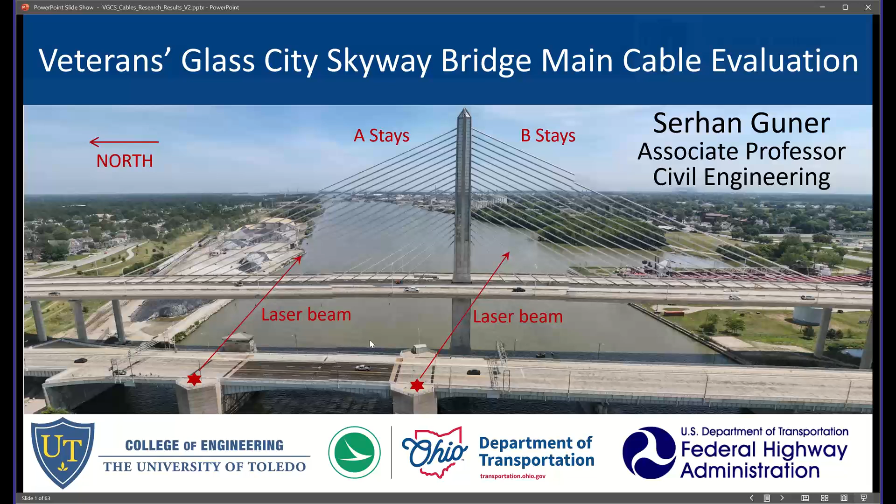Today, very nice, beautiful weather in Toledo, and this photo also shows that condition. We are talking about a signature bridge located in Toledo crossing the Maumee River.

I would like to start with my acknowledgements. I would like to acknowledge ODOT Technical Advisory Board: David Geckel, Jared Bax, ODOT Program Administrators Jill Martindale, Jennifer... sorry, all right, I think something happened. All right, Jennifer Springs, University of Toledo faculty, Dr. Douglas Nims, Daniel Georgiev, and my fellow graduate research assistants, Suraj Dungal. Special thanks, we did a lot of site work, you are going to see his photos soon - Yugesh Maharjan, as well as Sandeep Bajagain. So they all contributed tremendously to the success of this project.

So the focus is stay cables. They are the most vulnerable component of the cable-stayed bridge. The main concern is corrosion of the steel strands, plus there could be other deterioration conditions, which could be section loss, pitting, breakage, nicking, compromised grout or grease, voids, water infiltration. So this is a proactive project.

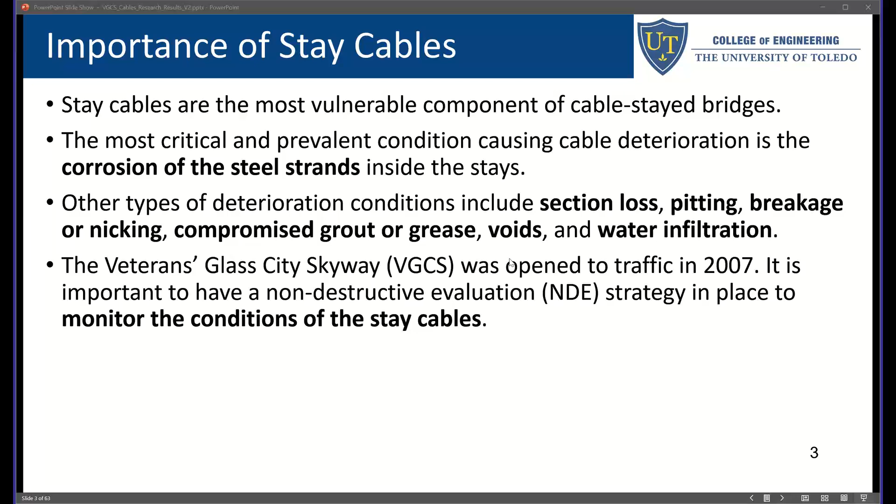The bridge opened to traffic in 2007. It has been quite a number of years since construction, so ODOT wants to have a proactive, non-destructive evaluation strategy in place to monitor the conditions of the stay cables. Are there any corrosion, any deterioration? Is it started, or when is it going to start in the future? So this is looking into that condition.

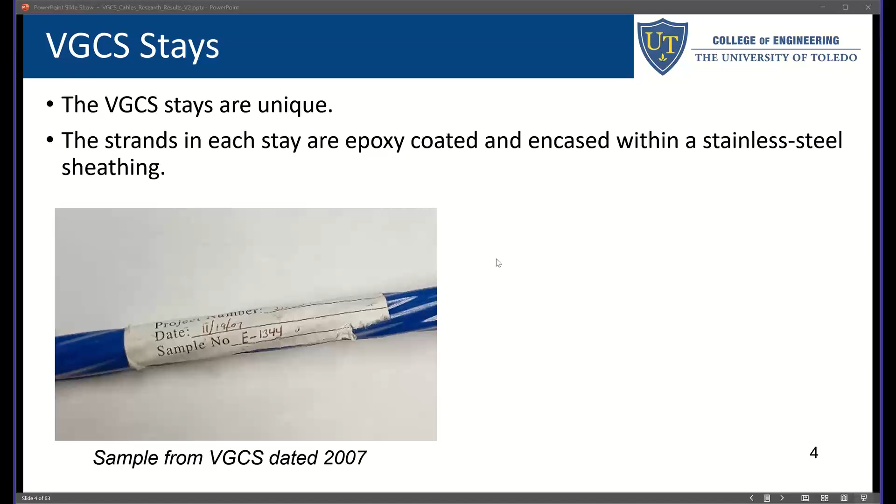What makes the project unique and interesting to us as researchers is the strands, because this bridge is unique. Strands are epoxy coated - these are the actual photos from samples received from the bridge. But what makes it unique is that there is no grout. These are non-compacted, so each strand continues all the way to the top of the pylon.

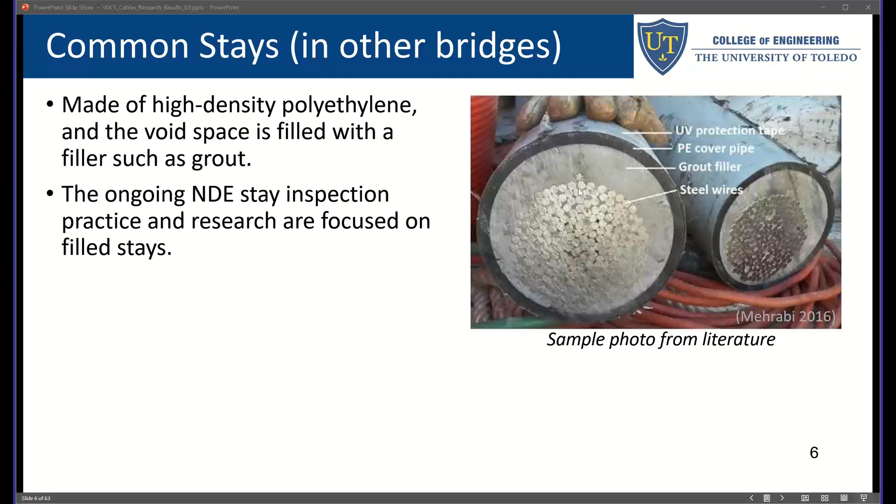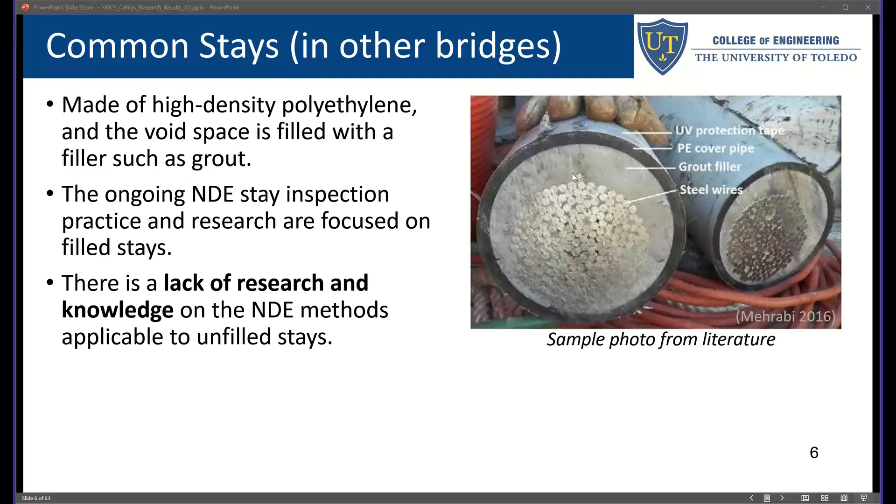Strands are compacted - this is a traditional condition. These are compacted, you can see all the strands together with the grout filler. So this is the case where we have lots of NDE in place. But because of our unique non-compacted situation, which is, by the way, in many cases a good approach for corrosion deterioration - and we can talk about it later on - non-destructive evaluation methods are really lacking because we don't have this very common setup. So the objective is to determine an NDE method for monitoring, but we would like to use existing technologies.

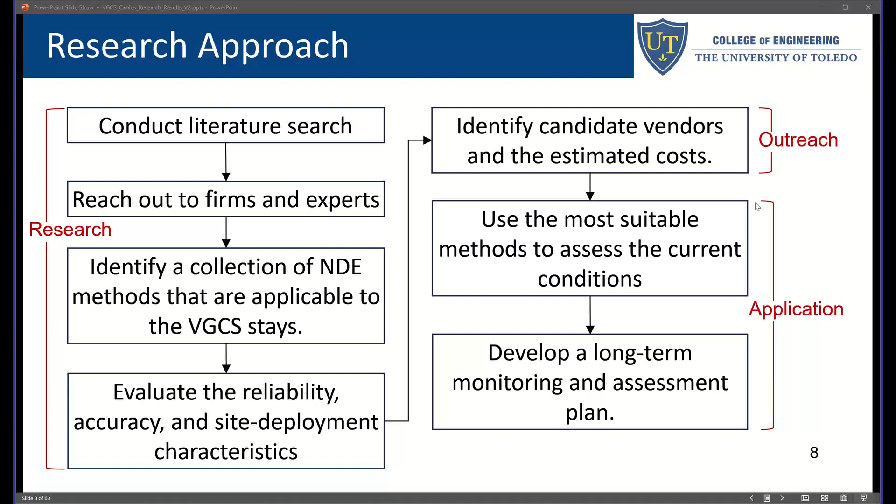This is not about developing a new technology which would take 5, 10, even 20 years. So it's about existing technologies as well as a long-term monitoring and assessment plan. You can see the research stages - this is the research phase, which we love doing. Outreach is all about seeing what's available, talking with vendors, costing, timeline, do they have it available? Sometimes the instruments come from Europe. Finally, application - whatever we selected, we get to use it and show that it works or it doesn't work. So that's what we did.

It is a big bridge, right? So you need to categorize it based on priorities. We have two important zones: the first one is the anchorage zone, the second one is the free lengths of the strands, which I'm going to show you in a photo. The anchorage zone is the most critical location because, as you know, you have a mass of steel coated with epoxy. Typically, if you have corrosion, it would start from the ends, which represents the anchorage zones.

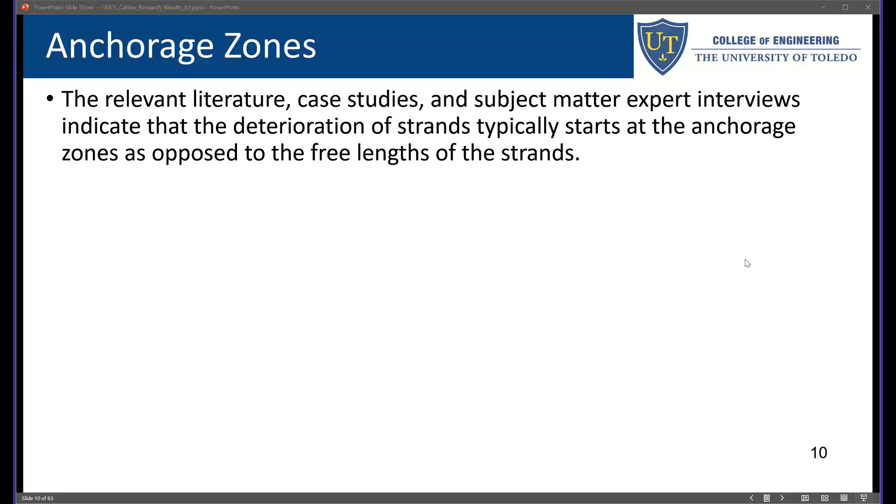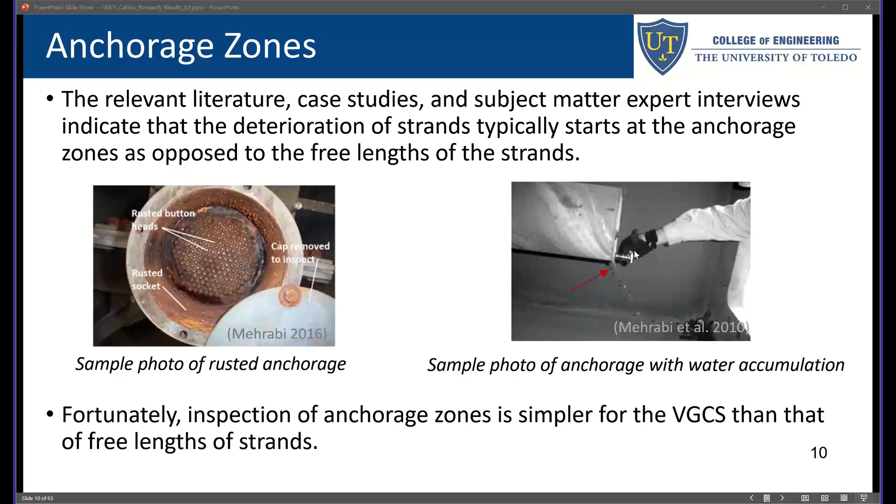Fortunately, inspection of anchorage zones is simpler than free lengths of the stays. How can you inspect? You can do hands-on inspection, which is really not non-destructive. I mean, you're opening things up, if you have that capability.

You can do visual inspection using a borescope or other methods. You can do dissection of sheathing for visual inspection of fillers and strands, which is again not non-destructive. You can also do material sampling and testing for anchorage zones.

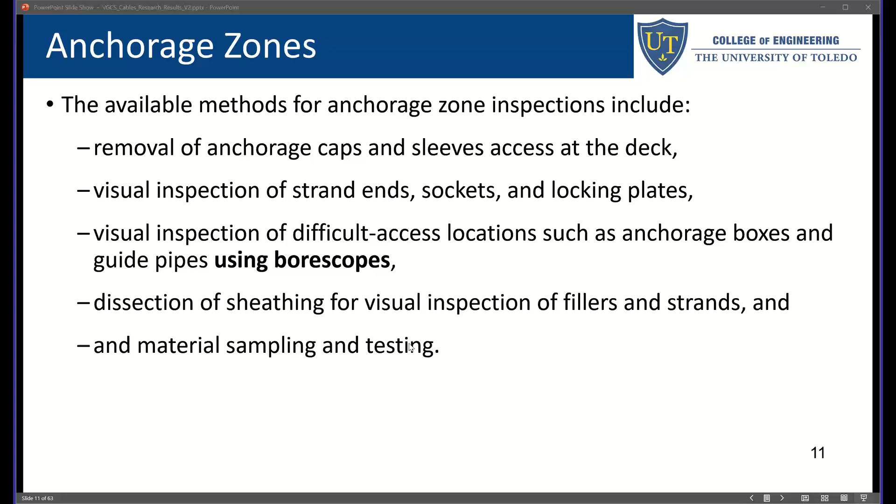The second priority to us is the free lengths of the strands. So once we see what's going on at the anchorage zone, there needs to be a method to look at what is inside, what's in the free lengths.

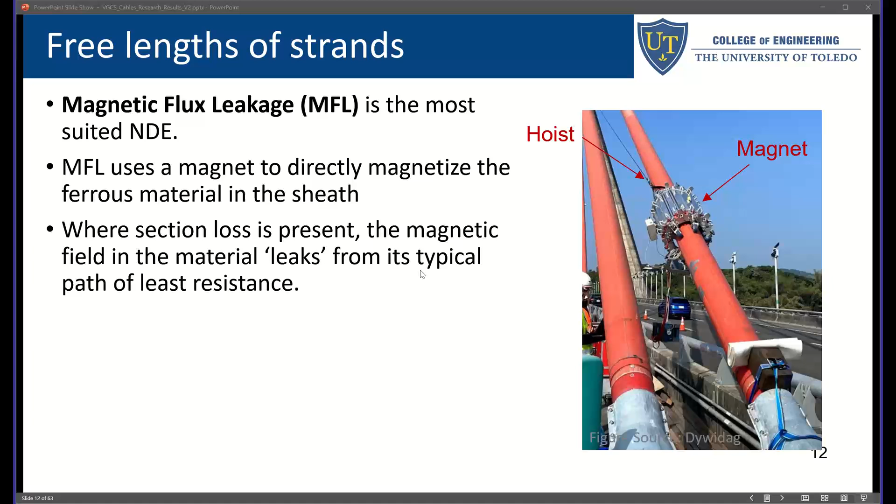One applicable method is magnetic flux leakage, which uses a magnet. There's a hoist, you pull it up, it magnetizes, and you can measure the leak from the path of least resistance, and detect corrosion. But this method is not for detecting superficial surface corrosion, so you won't be able to determine the point surface corrosion starts. There should be notable corrosion already taken place.

5 to 10%, I would call it closer to 10%. So 10% of the strand needs to be gone by corrosion, right? Or 5% in the best case scenario.

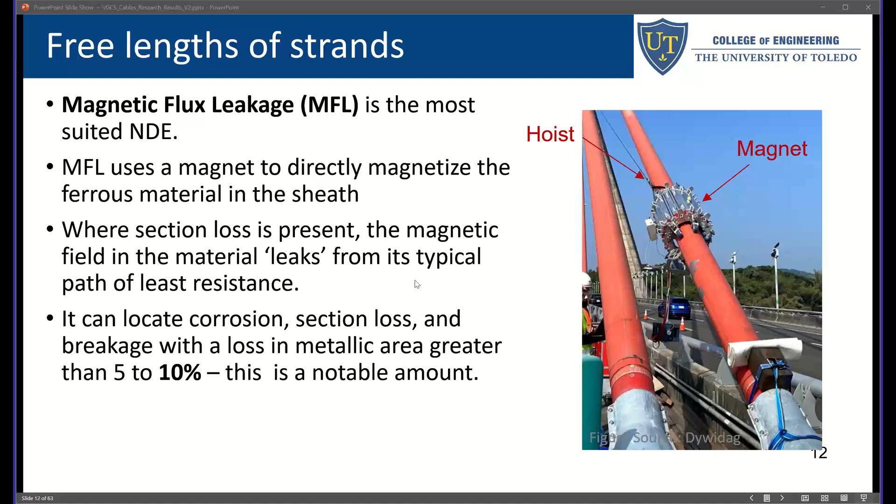The other method is the global health assessment. This is not just looking at the stays, but the holistic cable stayed bridge. You can use vibrational methods to estimate stay forces and compare them with healthy conditions.

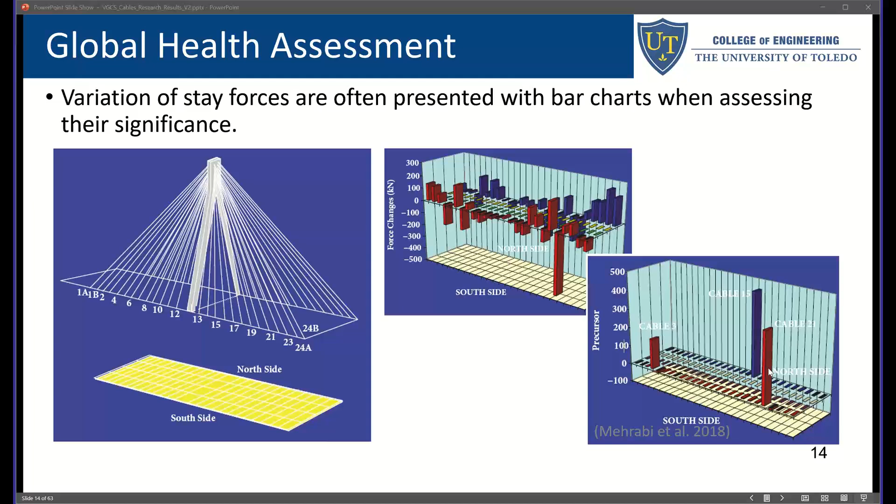This is just a sample from literature. You can determine the forces and compare them with healthy conditions, and look at the changes. For example, in this example, there are 3 cables with some notable changes, so that indicates something is wrong. It doesn't indicate there is corrosion, but it indicates something is wrong that should trigger a more comprehensive evaluation.

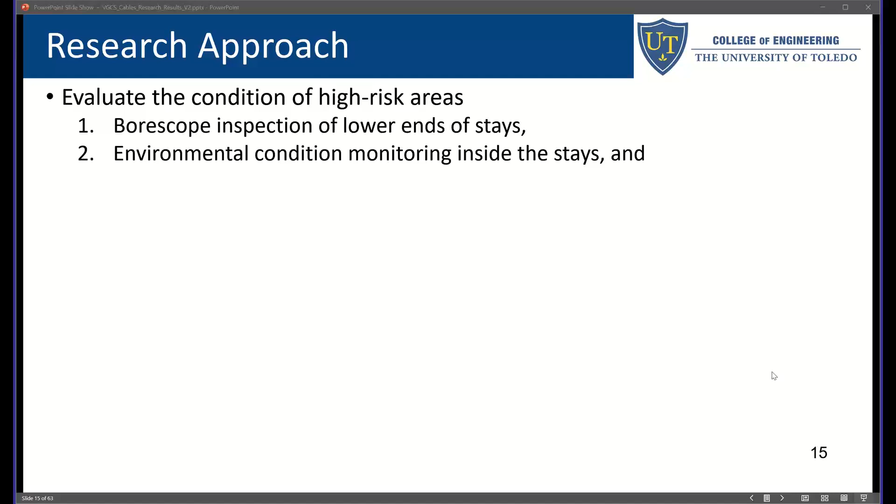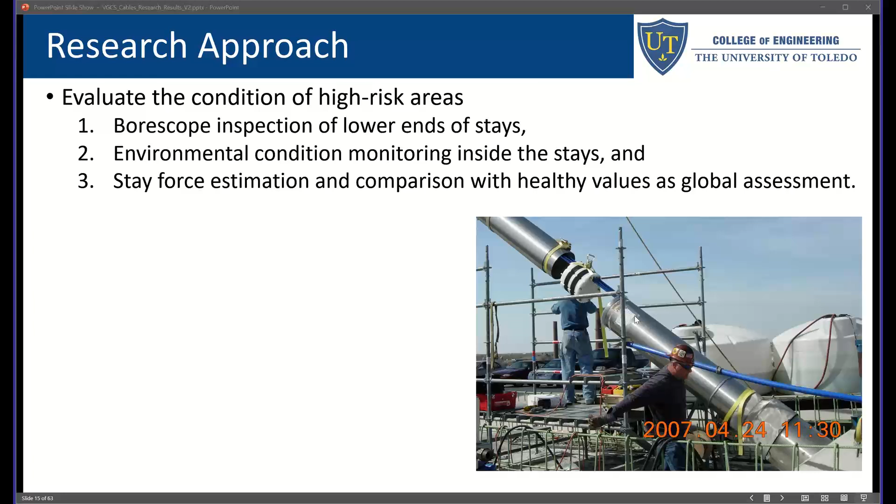Our research approach was to focus on high-risk areas, which is the anchorage zone: borescope inspection, completely non-destructive, we didn't open anything; environmental condition monitoring inside the stays, again non-destructive, non-invasive; and the third one is stay force estimation, the global health assessment—what are the forces inside stays, compared with the original healthy conditions. So these are the 3 things I'm going to be presenting.

If we detect any corrosion or any indication of deterioration, then the most difficult, more expensive approach, magnetic flux leakage, might be an option, in which, as I showed you in the photo, you slide a magnet, hoist it, and detect any significant corrosion, 5 to 10%.

So right now I'm talking about visual inspection, and then I will move on to environmental condition monitoring, and finally vibrational testing. So you're going to see what stage I'm at in this presentation.

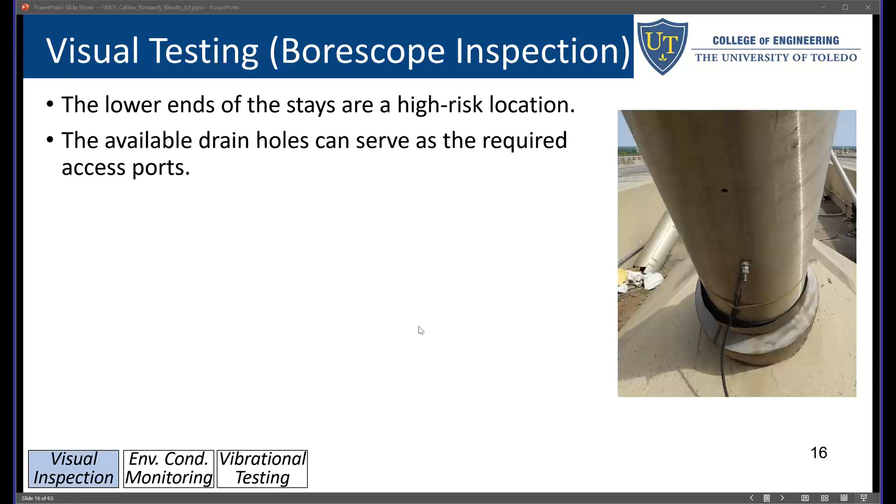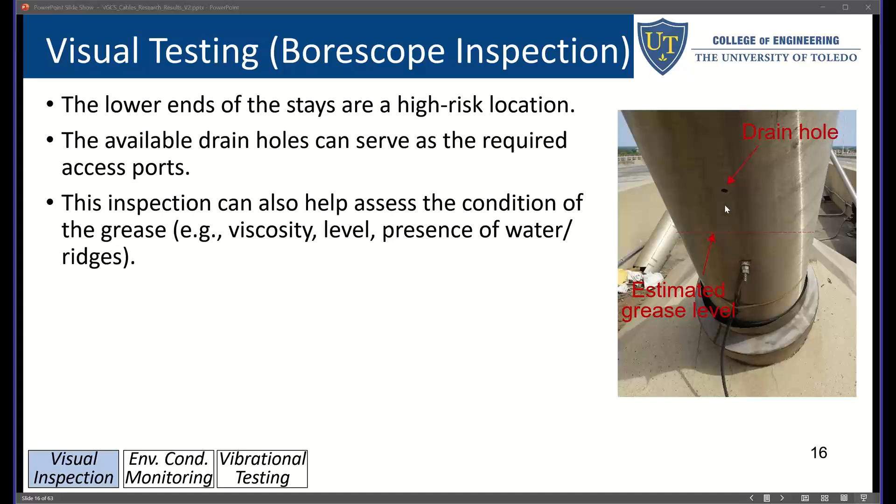We were lucky because there were existing drain holes, and we looked into options for how we could go in and do a visual inspection. Because if there's any water going into the system, this is a perfect location. There is grease—are there any water accumulation on top of the grease? How do those strands look like? Do you see water running down, or do you see them dusty? These are the things that we wanted to see.

You have a joystick, and you can adjust the angle, or the viewing location of the probe. We also used some aluminum wire because these cables are quite flexible, and we want to go upwards as well, so you need something rigid. You can see how we are doing it.

Down is a dangerous location—there is grease, you don't want to put that probe into the grease, so you have to be careful. But up, it's free, you can go as much as the length permits, and we use the entire length to go and see what's inside.

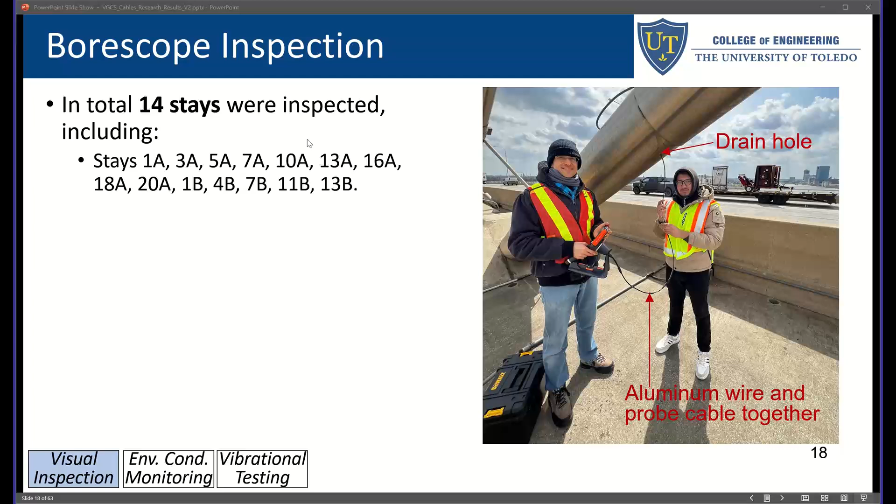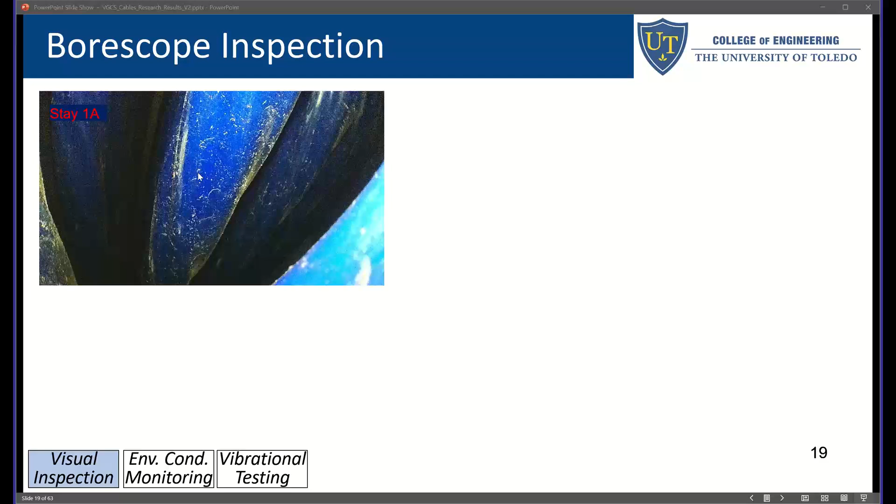14 stays were inspected, so it's a good sampling. 250 plus photos were taken. You can see the photos. Stay 1A, this is the north side of the pylon, the first stay. You can see how this is up, this is down. You can see the grease.

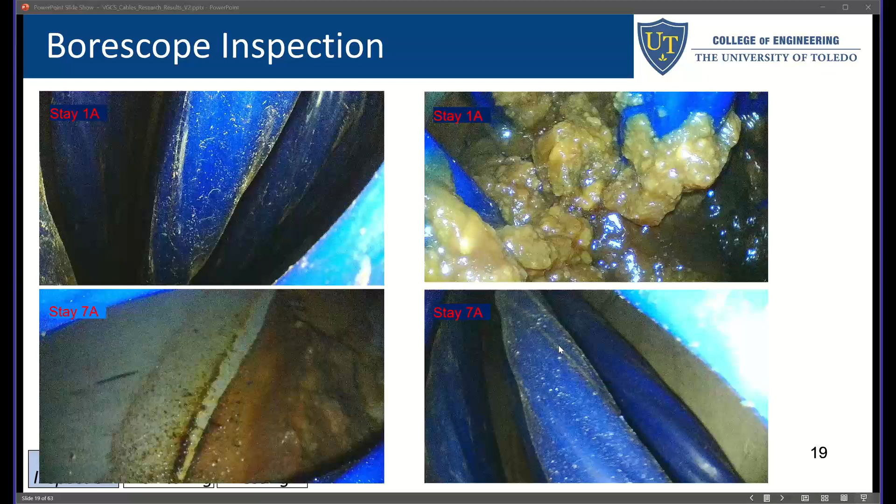You can see the side view. Grease subsided a little bit, but no water. We don't see any water. You can see this is another one looking up. Stay 7A, 10A, so pretty much the same.

Looks very nice, looks like brand new. Dust is a good indication. We like to see dust everywhere. It indicates that there wasn't any water running down. So pretty good condition. We didn't see any epoxy coating damage or chipping or any indication of corrosion by any means. Dusty, which is a good condition.

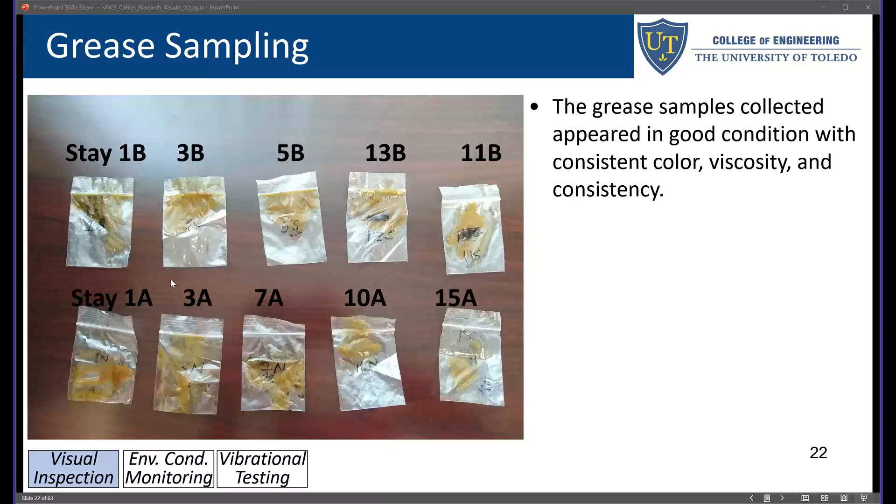We also collected some grease samples, because the question is, how is the grease doing? Is it keeping the viscosity, consistency, what's the color, etc. So we inspected these samples, and they appeared to be in good condition. We didn't notice any stiffness or any unusual visual changes in these samples.

So I'm done with the visual inspection. The second question we asked - yes, okay, good, we don't have any water, we don't seem to have any corrosion, but how is the inside doing compared to outside? Meaning, is it a really humid condition? Is it suitable for corrosion?

Because again, we are looking at the anchorage zone, but we didn't look at what's going on at some other locations. So we want to understand, is it more humid? Is the condition suitable for corrosion? Because you need moisture and oxygen. So if you have humidity, there's oxygen for sure, so you might have some corrosion.

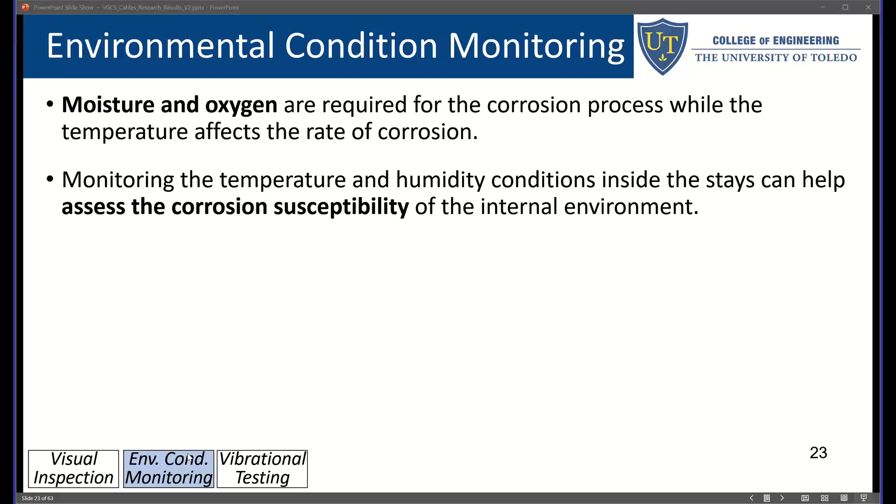So that's the objective. So again, we looked at what's available, and again we want to use the drain holes. Those holes really came very handy in this study.

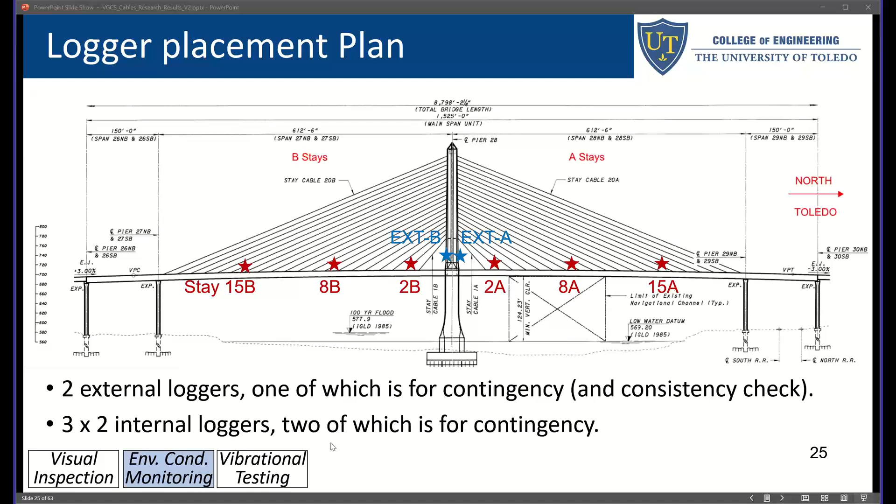We only need one, but we use two because something might happen, it's a site condition, open, lots of snow. So we used two external, as well as six internal, going into the inside of the stays. More than what we needed, because we expected failures. It's a harsh condition - yes, the loggers based on manufacturer are rated, but we'll see. We got some failures, so we really oversized, we used more than what we need in terms of sensors.

So you can see how they look. This is the internal one with the probe. You can see the ruler, it's about 4 inches length. There is an attachment point - you can attach anything, but we attached aluminum wire to make it stiff, because you don't want this to bend and go into the grease.

Humidity sensors, there should be no saturation. Humidity sensor, if you have rain, it is dead, you lost it. So the humidity sensor should always look up. If there's any water running down, it should go down, it shouldn't go up to the sensor. So that's an important consideration.

We also use this automotive wire loom tubing because of the vibration. The drain hole has sharp corners - of course, any hole will have some corners and it might cut the cable. So you want to really put it in, and we saw that it even cut this one. We didn't have any failures, but at some locations we saw it started to eat this tubing.

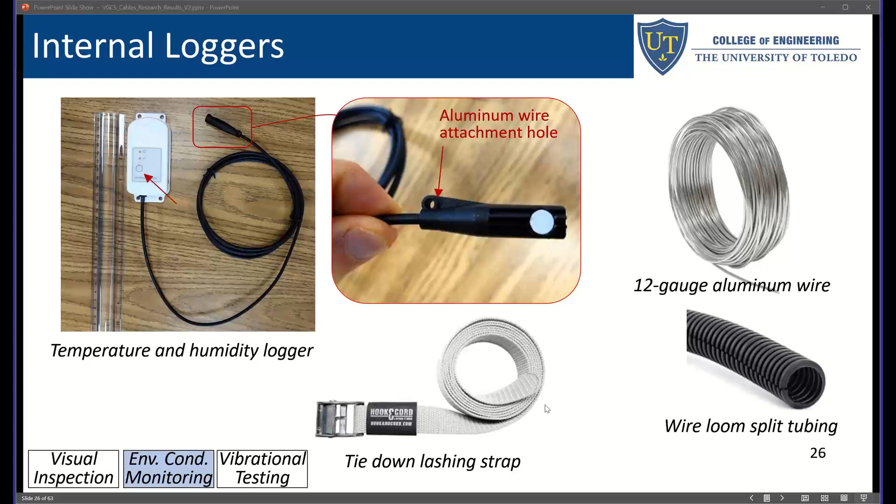So it's definitely recommended. This is the strap that we used for attachment. You can see how we are doing it. This is the bundle - probe, cable, aluminum wire, tubing together, stitched with electrical tape.

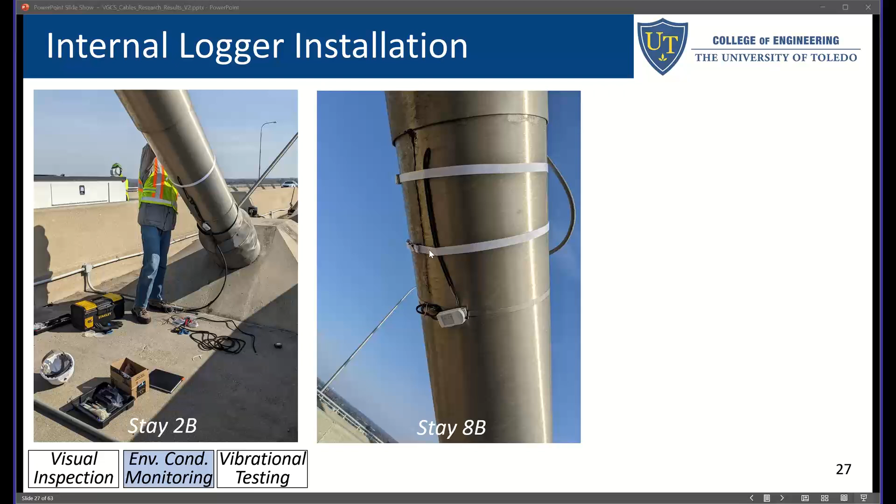So the hole should be suitable. We measured everything. You can see this is how we attached the logger, a lot of zip ties. These are different stays, and as you can see, the cable goes down and the probe should go up. If it goes down, any water here would run down, which is something we don't want in this study.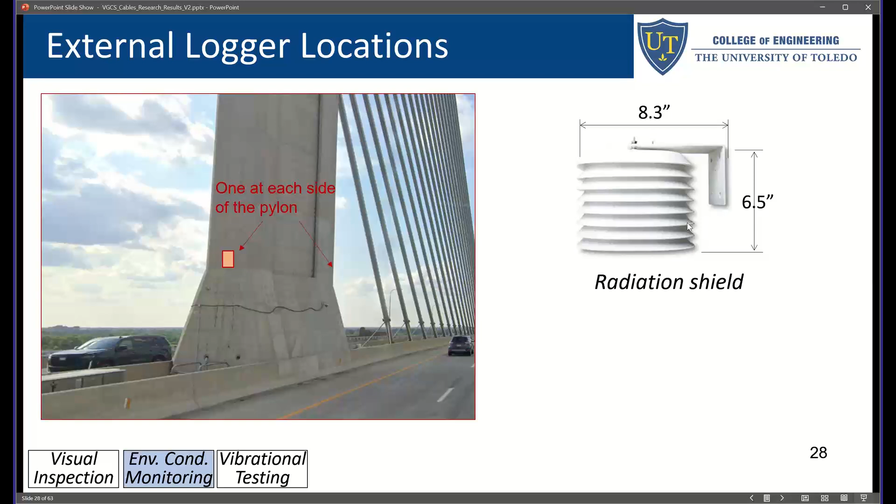And 2 external, one to the north side of the pylon, the other on the south side. You want to put it in a radiation shield because you don't want direct sun exposure. And we check the consistency, I'm going to show you in a minute. Both measured exactly the same temperature, exactly the same humidity.

This is the installed version, installed logger, which is very small. You cannot see it clearly, but if you are driving by, you can see these definitely.

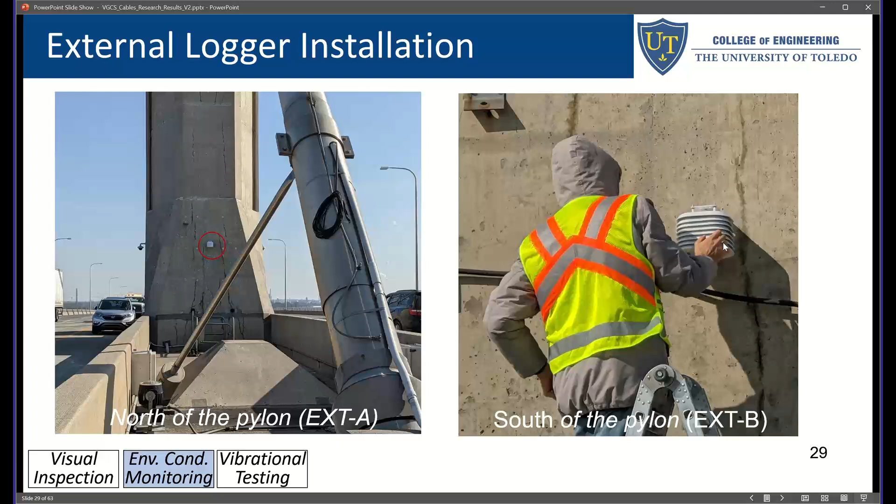So two issues. The first one is battery life. We had to replace batteries. Battery replacement is not something very user-friendly. You need to open up the device. There is a dehumidifier bag in it. You have to replace it, replace the battery, put it back. So it's something that we had to do.

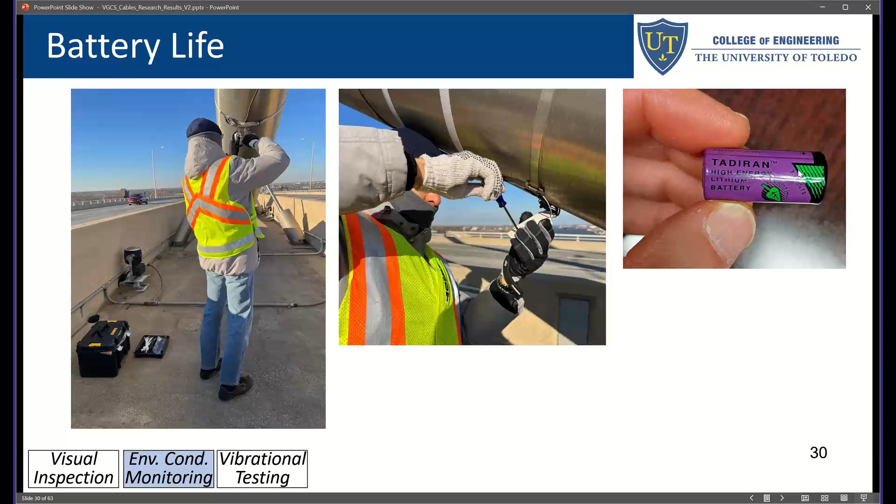This is the battery that's used. Based on the manufacturer's data, the battery life is 5 years. This is what we did: power saving mode enabled, we use a logging interval of 30 minutes. So even with a 1 minute interval, it should last 5 years, but in our study, it lasted 9 months. That's why I told you the manufacturer's data may not be representative.

Some of you might think, oh, maybe the loggers sat on the shelf for long. We checked the battery manufacturing date, it's written on the batteries, and it was 24 months old. So even if you count all the days the logger were sitting on the shelf doing nothing, not recording anything, 24 months is still not 5 years.

The second issue is the logging interval. We don't need very frequent measurements. 30 minutes is more than enough for our purpose because things do not change. This is not an instantaneous change we are looking for, it's long-term monitoring. So this is the configuration we set it up. If you set it to 30 minutes, there's a memory inside the device, and it would let you record for 1.8 years, which is what you want.

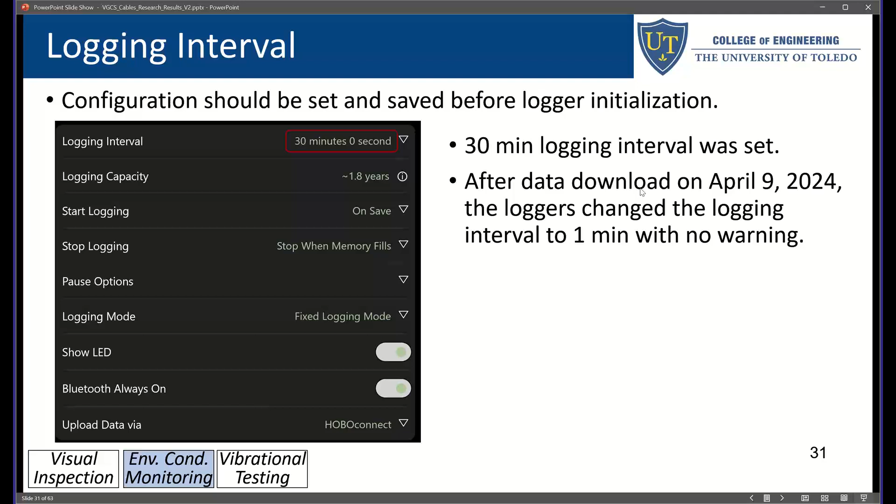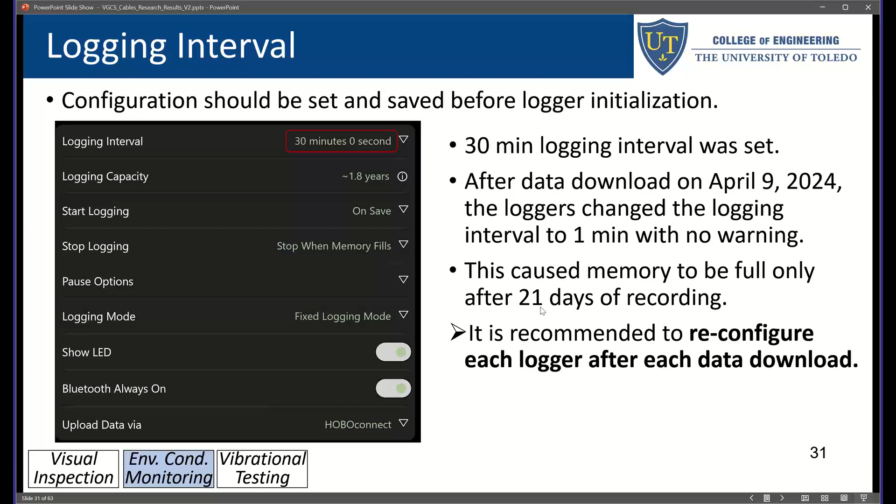But something happened during the April 9th data download. It switched back to the default 1 minute, which we didn't realize. So what happens if that happens? Your memory would be full in 21 days. This is something we experienced. So the recommendation is that whenever you download, you have to check your logging interval all the time. You don't want it to go to 1 minute and then stop recording data. So we lost some data because we were expecting 1.8 years, but got 21 days. We lost a couple of months of data.

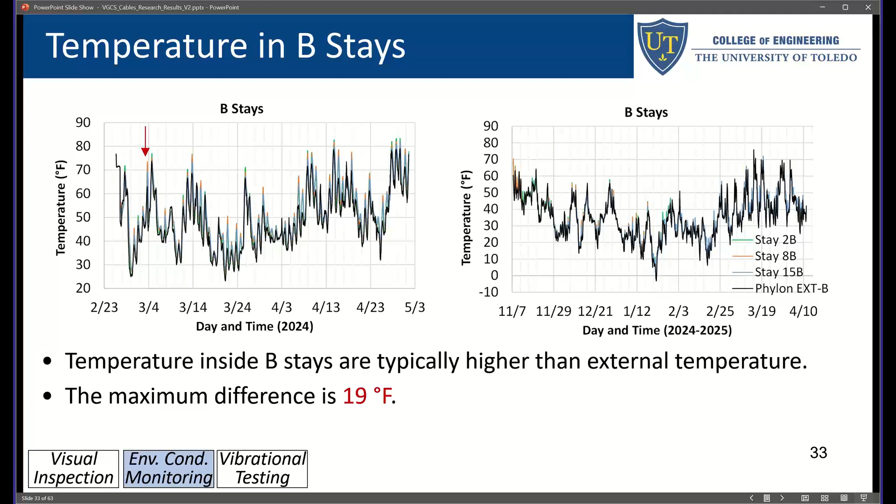If you look at B, very similar, it's 19 degrees higher. This is happening around March, so temperature is higher as expected.

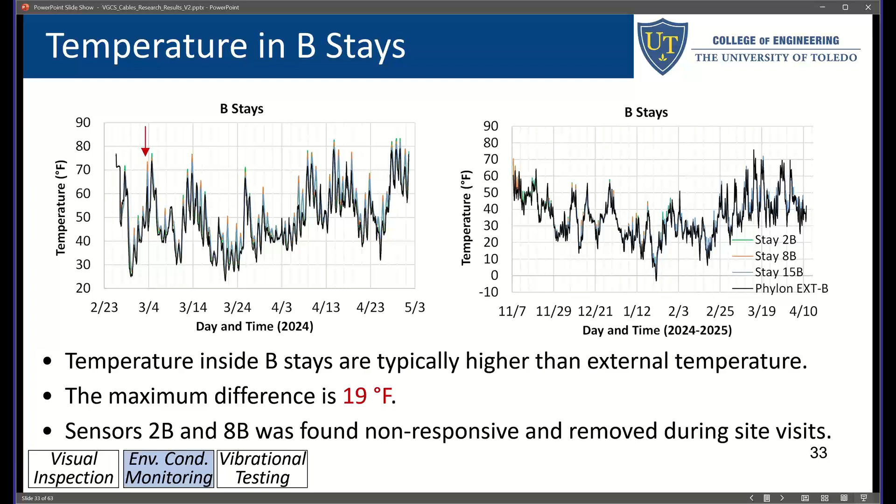We had some sensor failures. We were expecting that to be... 2B and 8B was found non-responsive during one of the site visits, so we took it out, but we already had more than enough sensors, so we ended up with 2 external and 4 internal versus 6 internal.

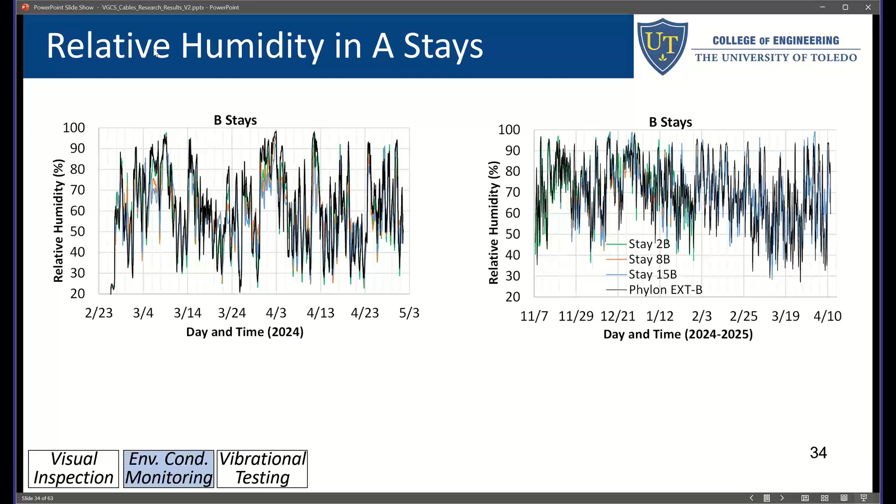What we should be using is a measure called dew point, which is a combination of temperature and humidity, so it takes account of both. If you look at humidity, 50% humidity, 50% humidity, 50% humidity, right, but there is much more moisture or water in this case. So relative humidity is saying 50% of the cup is full, but the cup size is dependent on the temperature. As temperature gets higher, air can hold more moisture, so the cup size gets increased. If you look at dew point, which is the absolute measure, that's what should be looked at. Dew point 37 degrees indicates much less moisture than 74. So that's really what should be used.

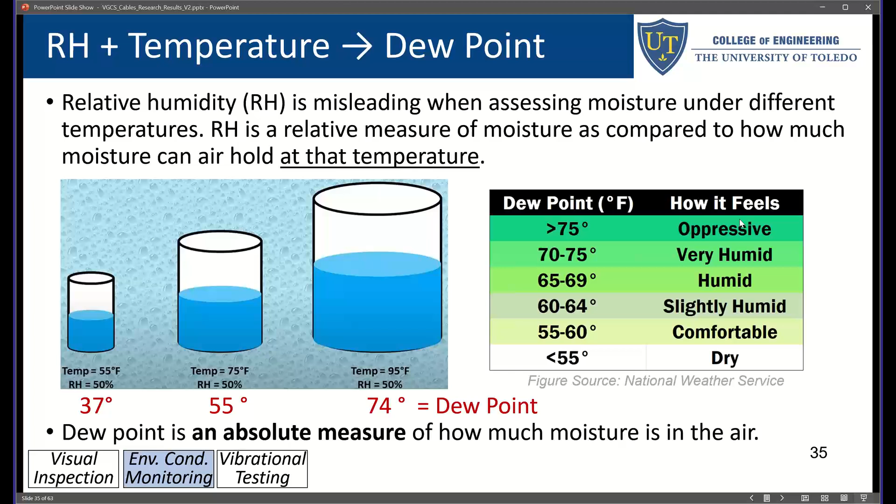Maybe you are using it already when you are checking temperatures during summertime. This is for humans, but still it's a good indication. So if you're checking dew point, if it is 55 to 60 degrees, you would feel it comfortable. But if it gets higher, so 74 is really oppressive. You are going to feel that it's really dense. The air is filled with humidity, right?

So if you look at dew point data, of course we have larger dew points. As you can see, the black one is external, the color ones are internal sensors, and you can see substantial increases inside in terms of dew point, or in terms of humidity. But the good news is that they are typically at the lower points. We don't have a peak point and then going up, with a few exceptions, maybe one exception, which is a minor 5-degree exceedance, which is acceptable.

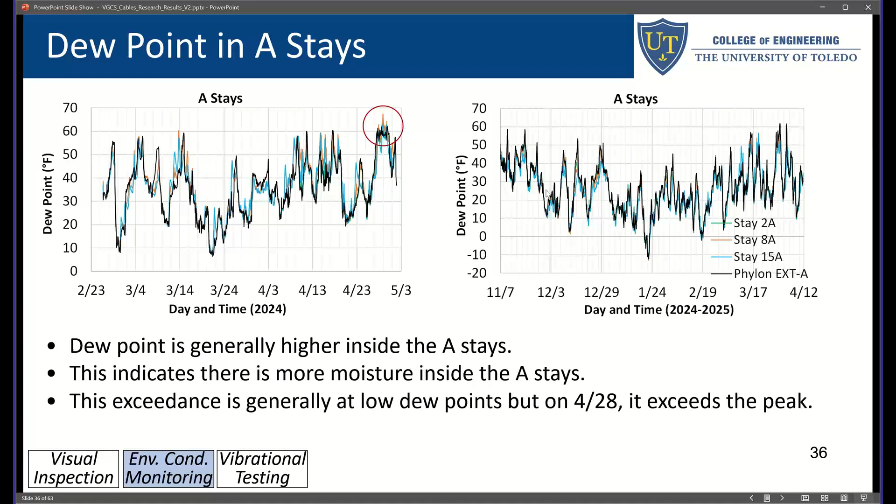So again, we are not looking at a couple of degree difference. Of course it's going to be different. Inside is going to be, it's an enclosed area. It's expected to have more moisture in it, but we are looking at a trend that inside is consistently humid. There's like a very substantial difference, you know, if you look at the data, we don't see that. It's very, very similar, in many cases lower. There are some exceedance, but it's not exceeding at the peak points, with one exception. So we didn't have any concern for excessive humidity.

This is sensor consistency. How are we measuring? Do we have some reliable sensors? Yes, we do. These are the two external sensors. They are measuring the same thing, external temperature, and you can see, hard to distinguish, they are on top of each other, so it is pretty reliable.

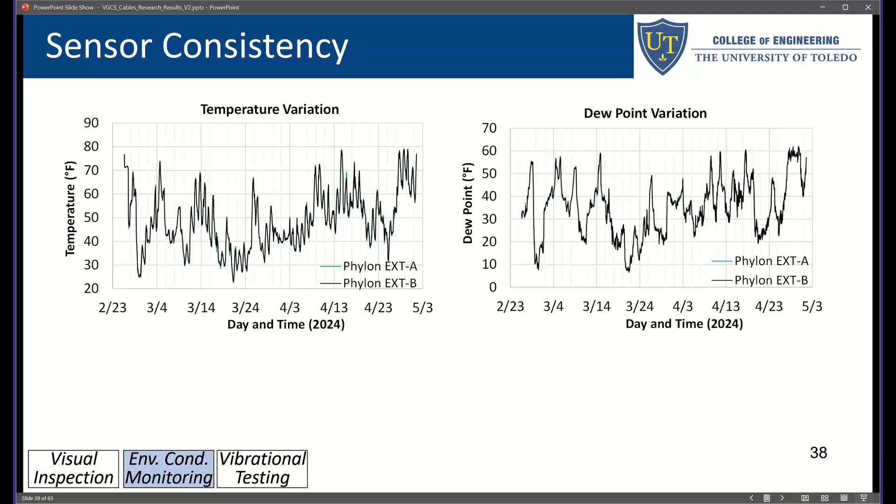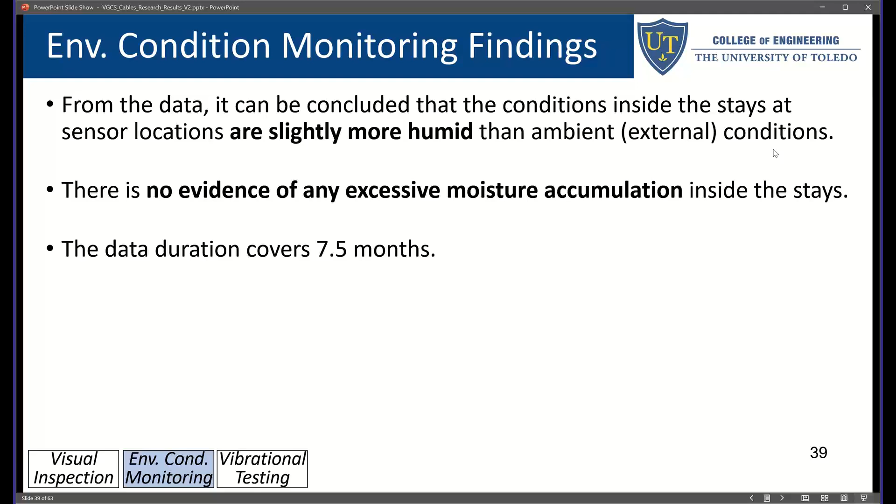In terms of temperature variation, this is dew point variation, so we are measuring the same thing, consistent. So as expected, inside is slightly more humid. However, there is no evidence of sustained or any notable excessive moisture inside. It stays 7.5 months, that's the entire duration. But again, the conditions same. We didn't have any indication of any month or any time that we have excessive inside moisture accumulation. So we felt 7.5 months is suitable to reach our conclusions.

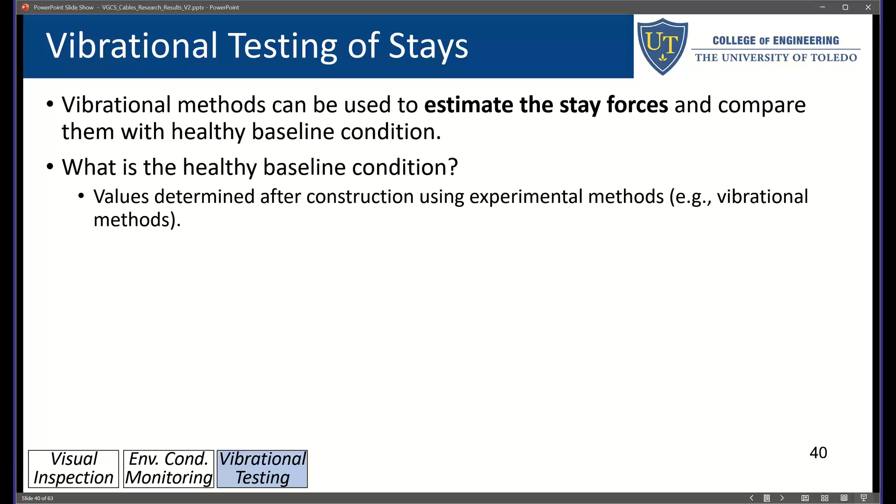This is the final part, maybe the most interesting part. We did it for the first time. This is the global health assessment. What happened? Cable tensions are very important. What happened to cable tensions since initial construction, 2007? So the big question is, do you have the initial values, which is the healthy baseline conditions? Because once you measure it, you are going to compare it with the original healthy condition, which you need to have. So you can have it using experimental methods. Somebody might have measured it, or even better, you might have your contractor measure it using load cells.

So load cell measurement is the most accurate, most reliable method, because it's non-destructive. They really use the anchorage points, install the load cells, and they really mechanically measure it. It's not a sensor measuring it. So we are fortunate, we have the contractor load cell measurements. So we have the healthy baseline values for that.

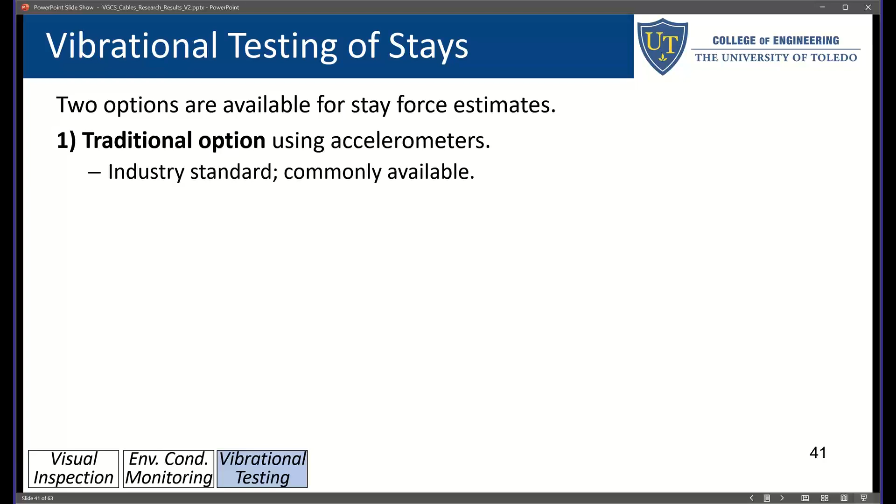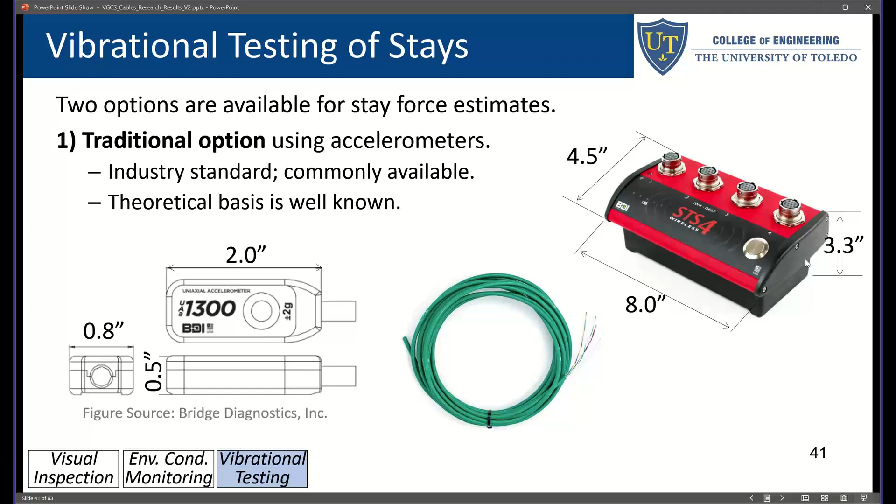So we have two options for our measurements. The first option, some of you might be familiar, would be accelerometer. This is the really industry standard, inexpensive, commonly available. Theoretical basis, we know it very well. You use accelerometers, which are pretty small, 2 inches. There's a data acquisition system. You run it with a cable, so it's a wired system.

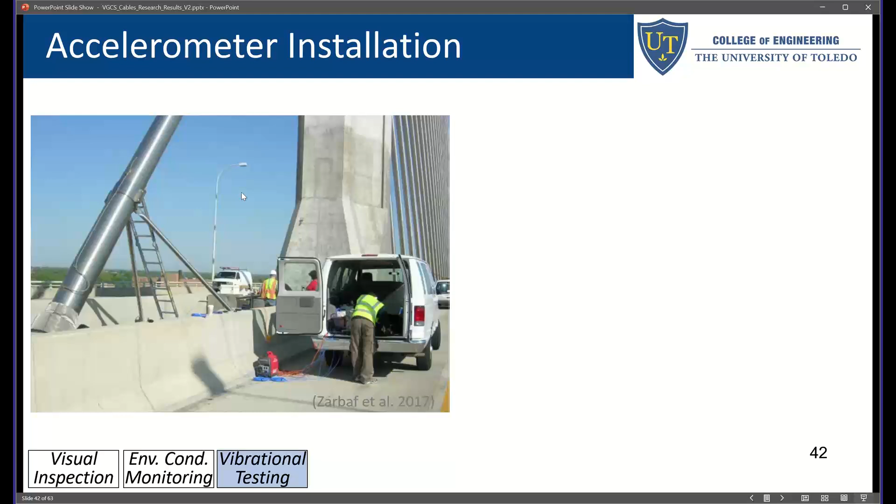So you can see, for example, there is one accelerometer attached here. The wire comes down, which is here. Sorry, it is attached here. I think this is grounding something else, it's not what we are looking for. So you glue it to the surface, run the cable. Yes, a bit labor intensive, a bit tedious. You have to do it one after another, and it might take maybe 2 days, but that's something done commonly.

The problem with this one is you are measuring the outside vibration. So this measures vibration and then you convert it to force. This is good for grouted stays, right? Because the grouted stay, everything inside and outside would vibrate at the same frequency. That's what you are going to be measuring. But VGCS, as I mentioned, inside is not grouted.

So the inside might be vibrating and the sheathing might be catching up a little bit later. So they may not be vibrating as a unity, especially at the lower as well as higher points.

So for VGCS, think about this. For the entire stay to vibrate with the same frequency, you need to get the measurement from the central location, maybe central one third. This really makes accelerometer measurements impractical, because how are you going to install those accelerometers and then run cables? Yes, it's doable, but it would be very expensive and perhaps an unnecessarily complicated procedure.

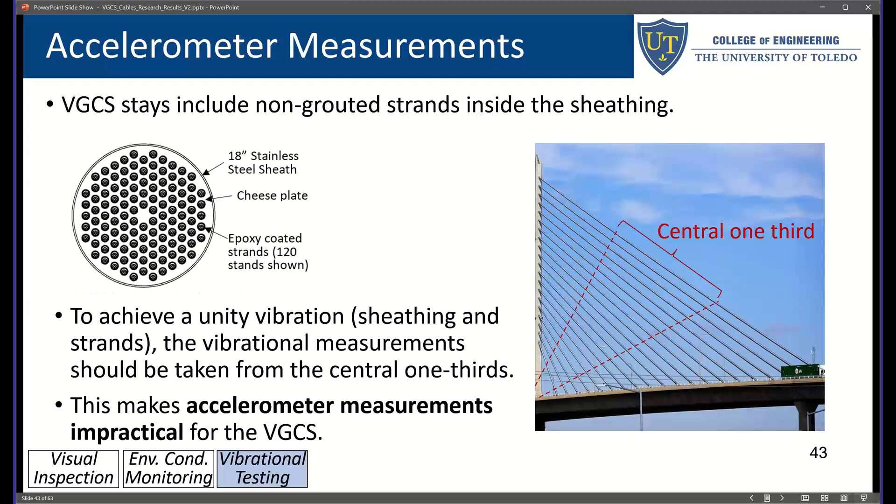The second approach, we looked at how we can use some mechanical engineering methods. They use vibrometers, especially for the automotive sector. Using a vibrometer, you can measure the vibration of a car engine or anything vibrating from a distance. You don't need any cables, you don't need to install anything, you're just shooting at the vibrating object. What you need is the vibrometer, a scope for aiming, a lens of different lengths available, a tripod, and it should be precision because you're shooting at a distance, plus a data acquisition laptop and power supply on site. So this is what we used, and that was the first time we used it.

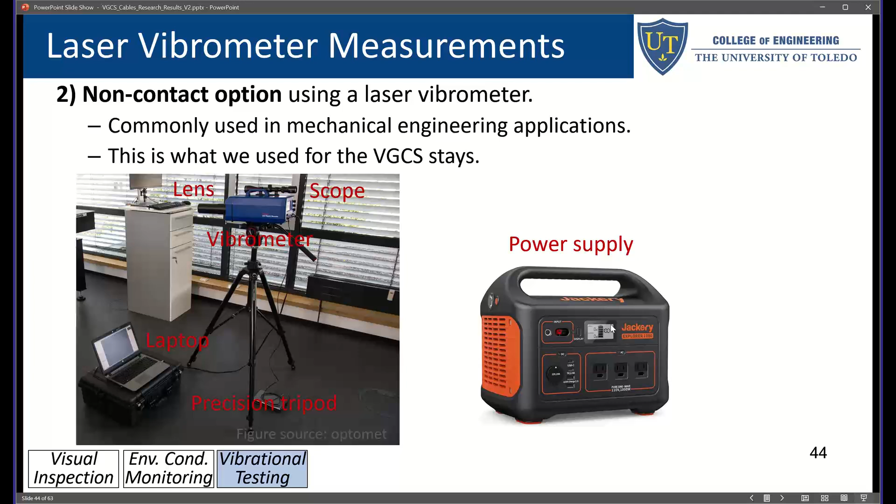We really enjoyed using that. So what you are measuring is the first natural vibration frequency, in hertz. That's the only thing you are measuring. Everything else in this equation is known.

L is the cable length. T is what we need - T is the cable tension - and M is mass per unit length, which we know. We know how many strands are in it, we know the mass of the sheathing, so we know all of these.

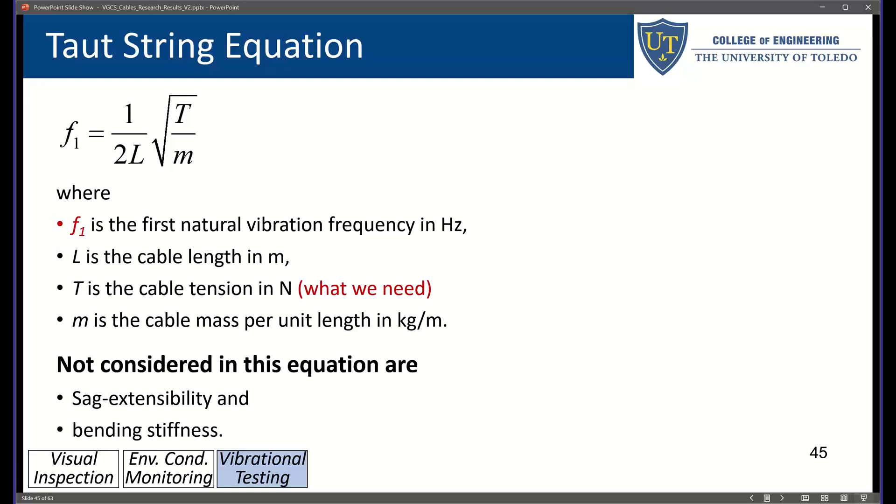Of course, this is a simple equation. It comes with some negligence, not considered, neglected - sag extensibility as well as bending stiffness. There is some bending stiffness, and these are not, this is not a string, right? So we are neglecting that, and there is some error involved.

First of all, there was an accident on Craig Bridge and the bridge was closed. We used that occasion just to test the setup. We didn't intend to measure anything, but we wanted to just see how the setup works - are we able to aim? So this was sort of like a test run for us.

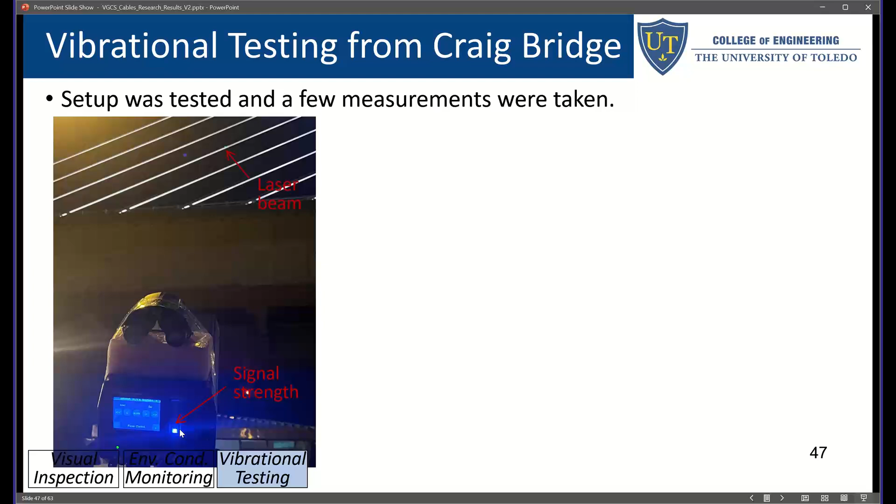So we went to Craig Bridge during night. During daytime we couldn't see the laser - it's such a small signal, and it was a sunny summer day, so this is not something you want to do on a sunny summer day. Maybe a dark winter day might be suitable, but we went with the night measurement for visibility purposes. Signal strength is low, and we have a huge distance in this case, but we just tested the setup.

You can see how we are shooting at the stays - this is the actual measurement from the deck. ODOT was really kind to close one of the lanes, because when you are measuring, you don't want trucks passing by and creating vibrations. There's always a concern, even with one lane closed.

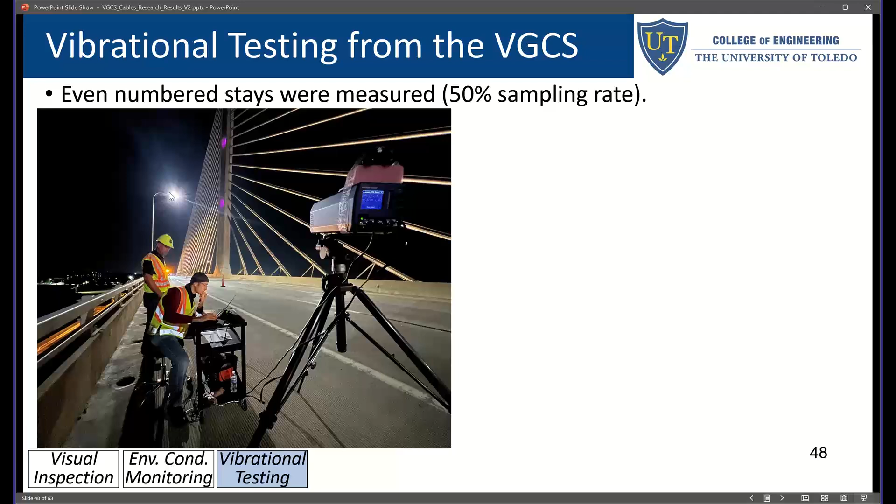So we set up - we didn't have binoculars, so we attached a homemade binocular as a scope, but it worked for us. Even with a naked eye, you can see it. Nighttime is a perfect time. Sometimes if there's a street light coming between you and the target, then you don't see it, and you have to change your location. This street light created a problem for us, so we had to change a couple of times. You can see, even from the photo, how we are targeting.

One thing you might ask: your machine is vibrating because the deck is vibrating, so the measurement device should be on a surface which doesn't vibrate, because if your machine is vibrating, how are you measuring something which also vibrates? There's a scientific basis for it - we don't want a resonance condition. We don't want the deck vibration frequency to be similar to the vibration frequency of the target, which is the stay in this case. If that happens, this method is not for you - it's not going to work, you are not going to get any reliable measurements.

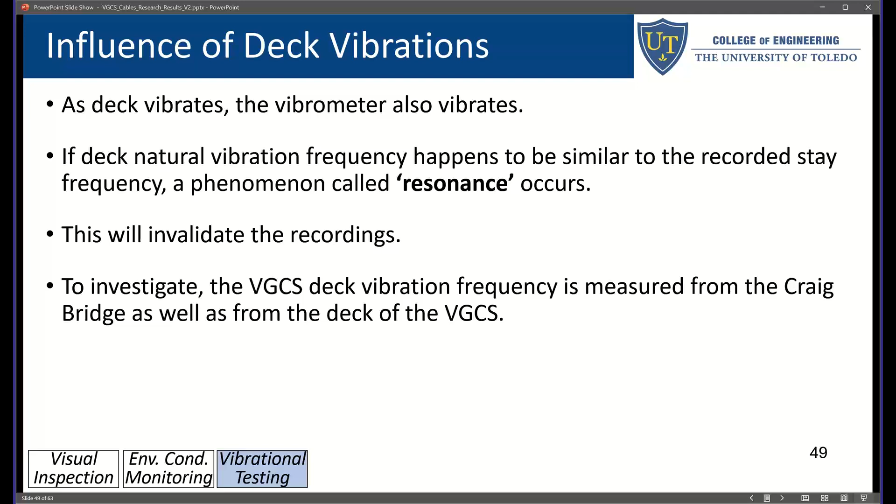So luckily we measured from Craig Bridge - the bridge was closed, we didn't have any vibration. So we targeted the deck of VGCS, and we know the VGCS deck vibration from that location. Long story short, we found the VGCS deck vibration to be 7.6 hertz, but the stay vibrations overall range from 0.6 to 3 hertz, so we don't have any close overlaps - we didn't have this problem. But it's important that you check whether you are getting close, and I can see that in some cases, depending on the stay length, you might hit the same frequency - then this method will not work for you.

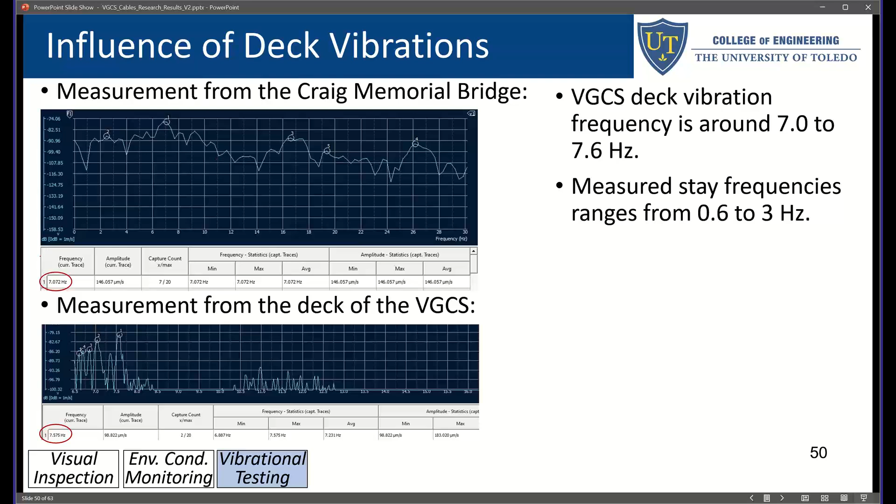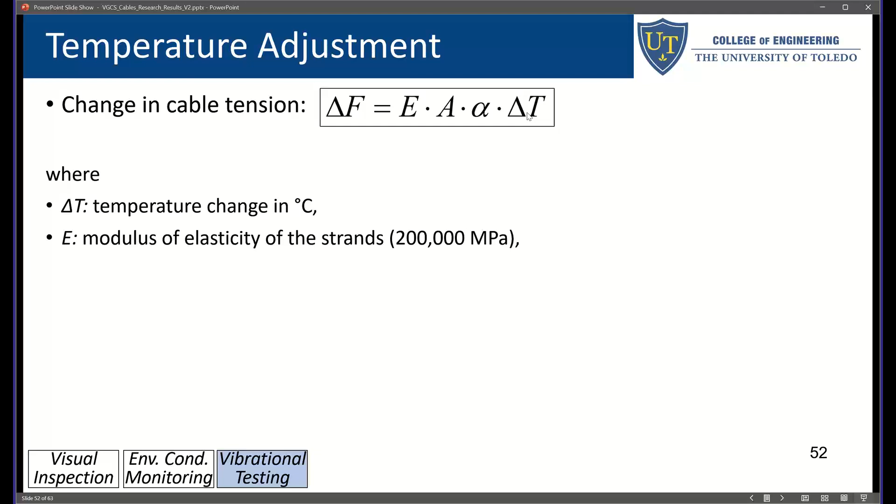Of course it's temperature dependent because these are long steel cables. You'd remember this equation from university: temperature change, modulus of elasticity. Luckily, the contractor measured the lift-off or healthy condition temperatures. Some temperatures are a bit ambiguous—is it in the sun or in the shade? So you've got to take some average. It's not an exact science, because every part sees the sun differently. This is what they used.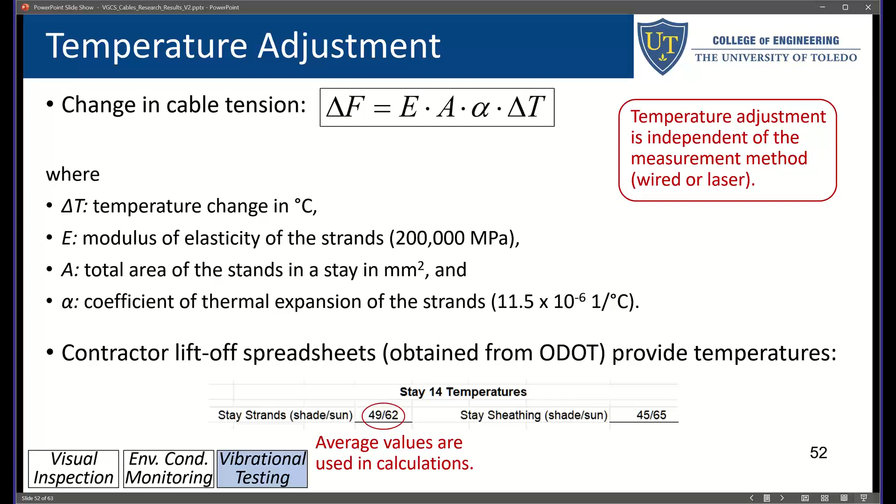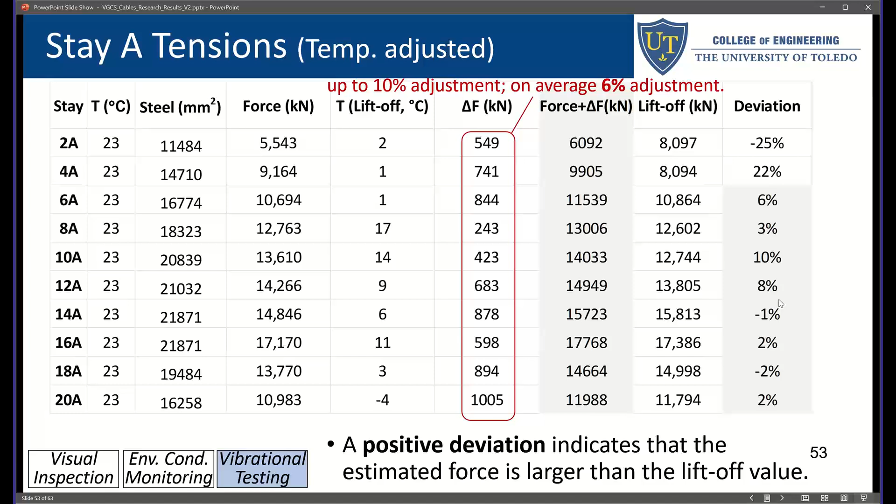So we did the temperature adjustments—quite substantial, up to 10% adjustment, on average 6% adjustment. This is stay tensions, and you can see the deviations. A positive deviation indicates that we estimated larger than the lift-off conditions.

These two need to be ignored. Our largest discrepancy is 10%, but other than that, if you look at these numbers, some of them are bang on—1%, 2%, 3%. We have 8, 10, and 6, which is acceptable considering all the errors you might be accumulating.

If you look at B, it's even better—0% bang on, up to 9% deviation. That's what we got, with 2 and 4 as exceptions, because those are pretty stiff, short stays. Let me find that photo. Yeah, 2 is this one, 4 is that one. These are very stiff, short stays.

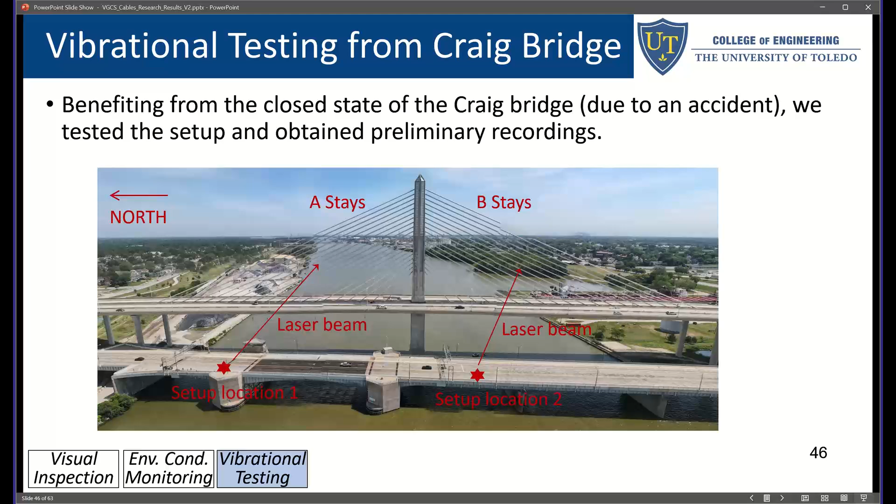Outside sheathing vibrates differently than inside. You need some length to have that unified vibration. So for the short stays, I'm assuming the first four, inside and outside would be vibrating differently, and any measurement, including accelerometers, will not be accurate for those short stays. So those are excluded.

Very good correlations here. This is the lift-off, what the contractor measured, and the blue one is what we are measuring—force plus delta F. Delta F is the temperature adjustment. We measured it in summertime, the contractor measured it on a winter day.

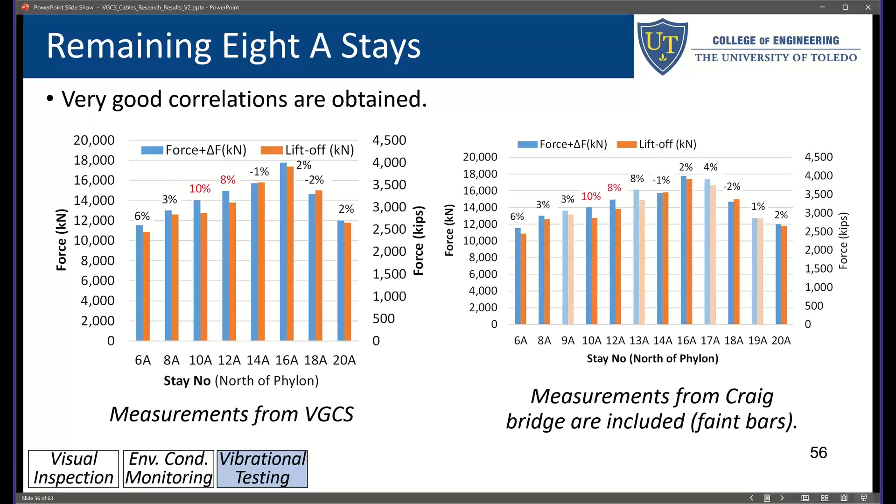You can see up to 10% deviation, including everything measured from Craig Bridge. Distance was high, signal strength was low—we didn't intend to measure anything, but it was pretty good: 3% deviation, 1%, 4%. That really brings up the idea that the measurement can be done from Craig Bridge. You don't need to close any lane—it's ideal for future measurements.

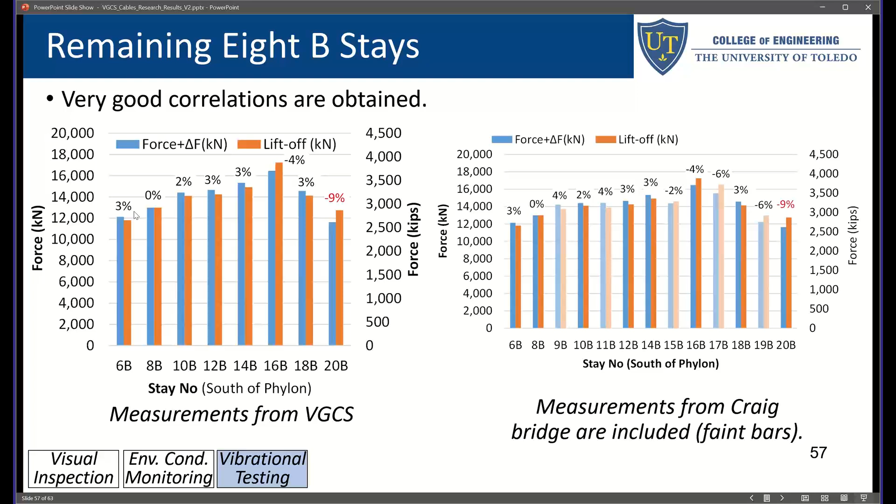Again, if you look at the B stays, beautiful, very nice deviation—some of them bang on. It's really remarkable: using a laser signal, using some approximate equations, neglecting certain factors, you can still get pretty good accuracy, looking at 2-3% up to 9%.

Pretty good. What we are neglecting is the stiffness of the stays. Temperatures are approximate—you can see sun and shade can affect things up to 10%. So definitely a couple percentage points of deviation might be happening here. Measurement method can introduce 1% error in frequency, which translates to 2% in the estimated force. So definitely some errors are made, but under 10% is very acceptable within the margins of accepted deviation.

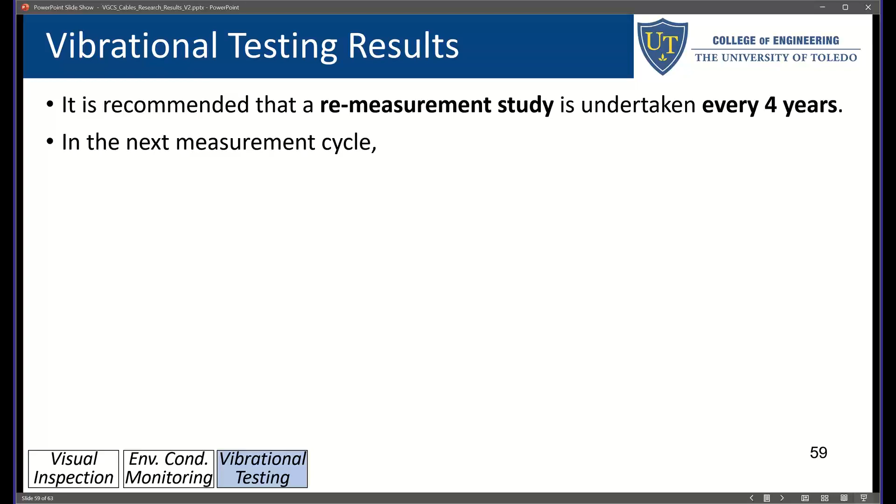So pretty good results. We recommend this measurement be done every 4 years to track things as a global health assessment. In the next measurement cycle, some attention can be paid to stays 10, 11, and 12—these are at 9-10% deviation, the higher ones—so some more attention could be paid there.

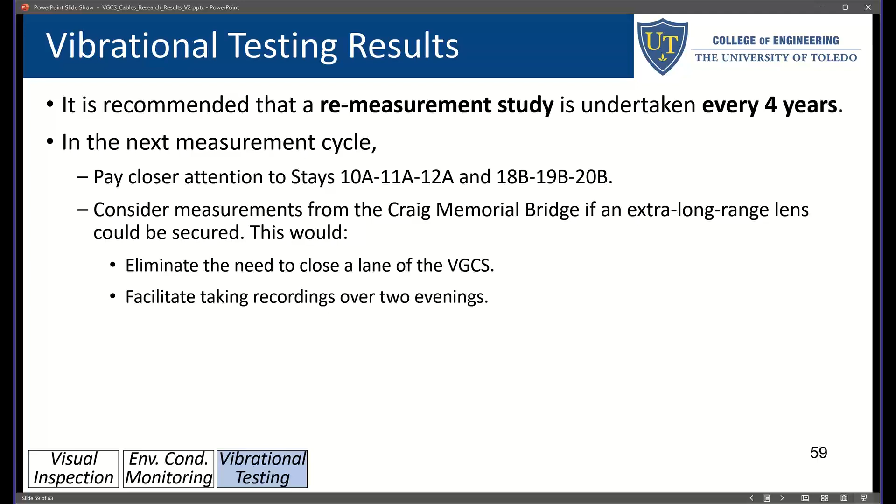Measuring from Craig Bridge would be very good—you don't have to close the lane, it's a very comfortable location, and there's not much vibration going on. So that's pretty much it.

Slide number 59. My target was to finish in 45 minutes—I have 4 more minutes to conclude before we take your questions. So, overall findings: again, the most critical condition is still the strands inside the stays.

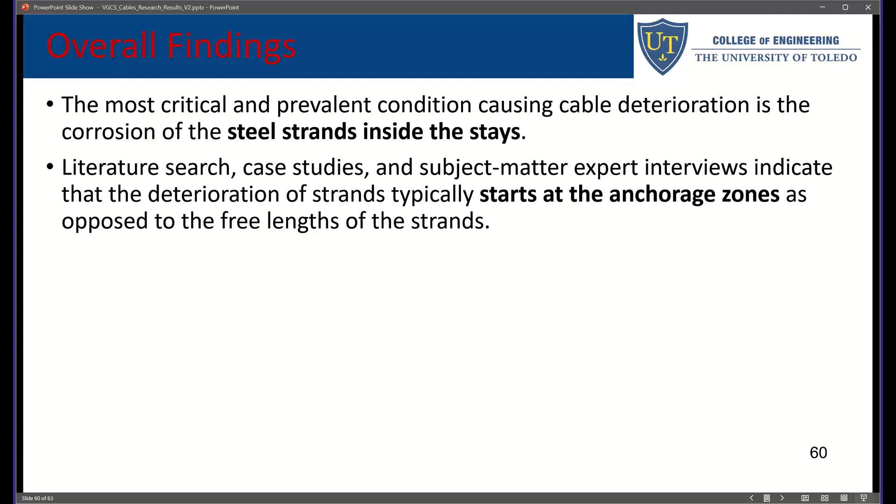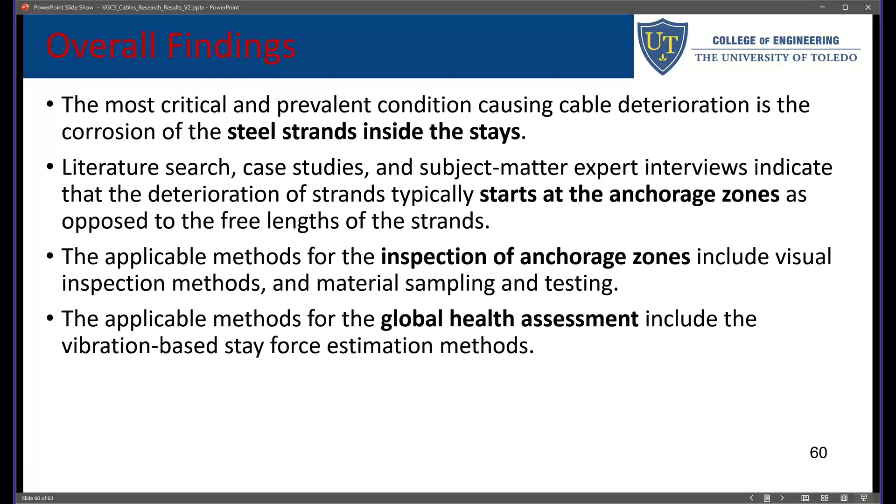Literature, case studies, and subject matter expert interviews—we interviewed quite a few experts—indicate that you have to start from the anchorage. The anchorage is the location where corrosion starts. You can do visual inspection or material sampling and testing. There are methods I presented in this presentation; we should be able to get it as a handout. Global assessment includes cable force assessment.

Using a laser vibrometer, free length is more difficult to assess. You should only consider it when necessary—when you see any corrosion at the anchorage zones. You can use magnetic flux leakage, or pull and replace a few selected strands.

This is what the manufacturer, Dywidag, considered. This is a unique signature bridge, and they designed it such that you can pull a single strand—probably not as easy as it sounds, but in theory you can pull a single strand, take it to the lab, cut it, do whatever testing. Of course, when you pull it, you replace it with a new one, so it becomes a replacement operation. You just replace one or two from each side, you're done, take the samples to the lab and inspect. At the end of the day, it might end up being cheaper and more practical than MFL testing.

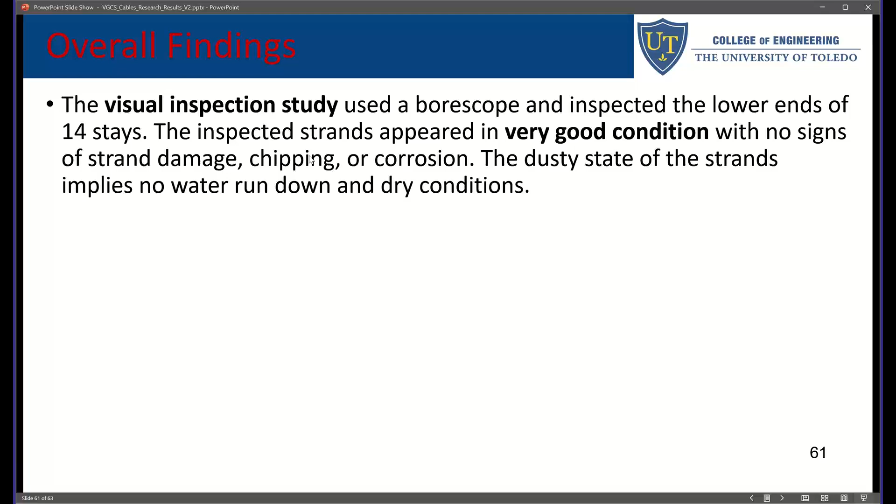Borescope visual inspection shows very good condition, no signs of damage, chipping or corrosion. It's dusty, but we didn't notice any excessive moisture inside. Outside is pretty similar. Stay force is less than 10%, which again is not anything concerning to us.

Our recommendation is that there should be a continuation of monitoring. So it's not just what we did, but ODOT has a comprehensive long-term monitoring program for all bridges, and that should really continue.

On top of that, with a 4-year measurement cycle, cable tensions could be estimated. If any evidence of strand deterioration is detected, free lengths could be considered using either a custom magnet for magnetic flux leakage testing, or pulling and replacing a few selected strands. This is a study - somebody needs to sit down and look at advantages, disadvantages, cost, etc. But we are nowhere close to this.

We didn't notice anything with the anchor zones. So our recommendation is this is for the future if needed - it may not even be needed anytime soon.

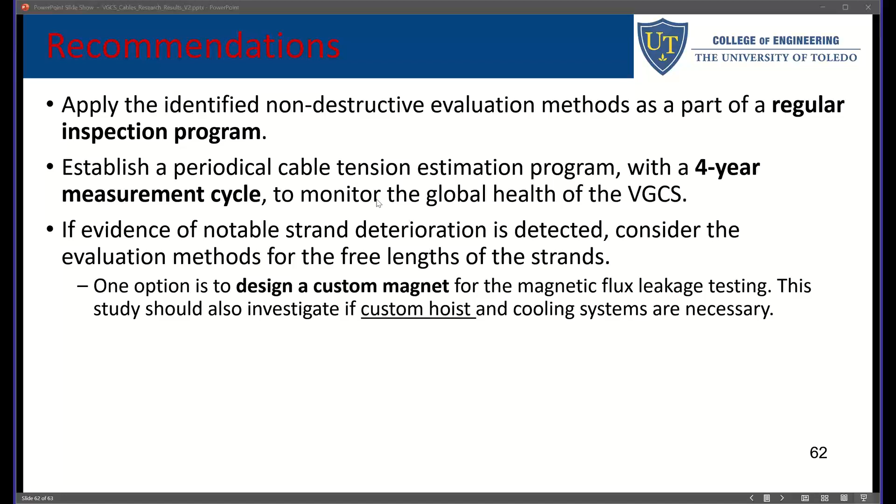The methods - this is a specific application, but the laser measurement method, environmental condition monitoring, as well as the other parts - you can really apply it to any bridge. It's possible. Laser measurement in particular, you don't have to close any lane, you can measure it from a distance. So it is a very applicable method overall. I recommend people to consider it for their own bridges.